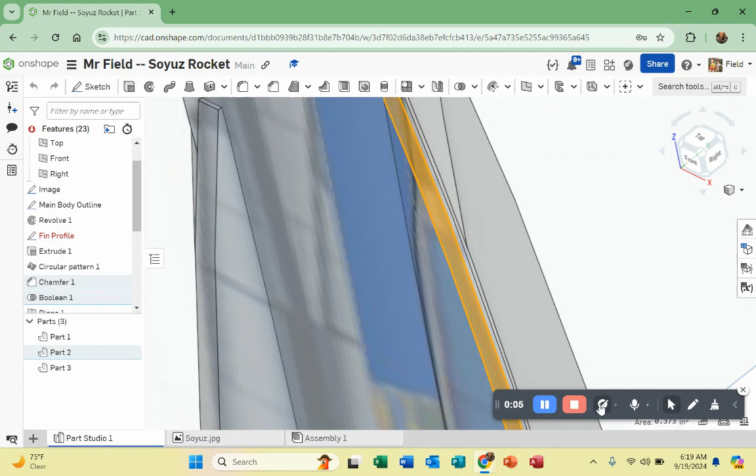Last video for the rocket. I'll finish all the little details that we really need to have to complete this.

One of the things I want to highlight here is that I put this chamfer in the top of my fin to make it more aerodynamic, a little better looking. I want to look at that a little closer.

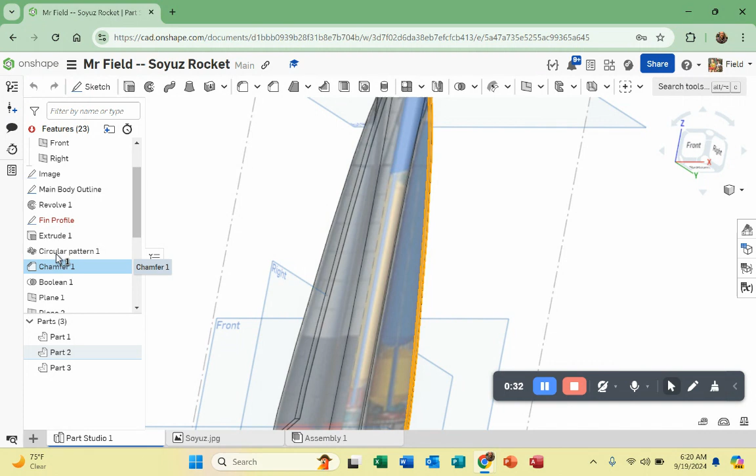Actually, I need to move this in the timeline. So I'll grab it here on the left, and I want to make the chamfer before I make the circular pattern. Let me repick it and show you the detail.

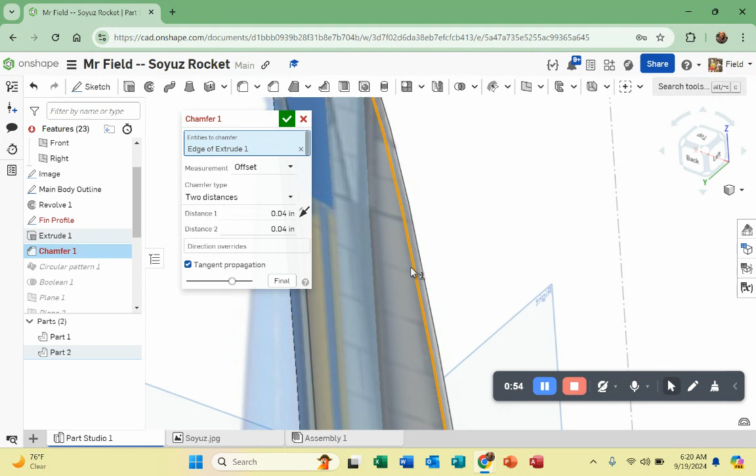So if I pick on an edge, you'll see it puts a chamfer. There are different types of chamfers - distance and angle, and two distances - and that's often the one I'm using more, because I'm picky and I like to have the look that I'm going for.

I want to show you that. In this case, I'm going to play with it and make distance number one a bit bigger, maybe 0.1. Let's see - okay, so that wasn't the one I was going for. I'm going to leave it at 0.04.

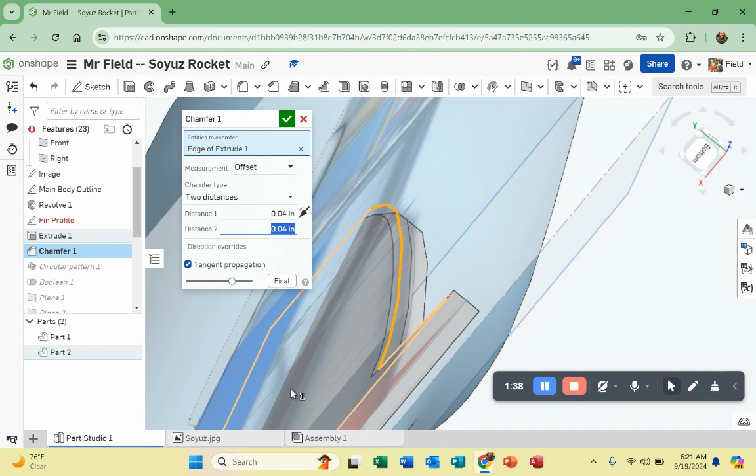And I'm going to adjust this leg to more like 0.2. You see that? That has got more of a leading back edge on it. And I'm going to duplicate that over here. Now we have a cool looking sharp fin.

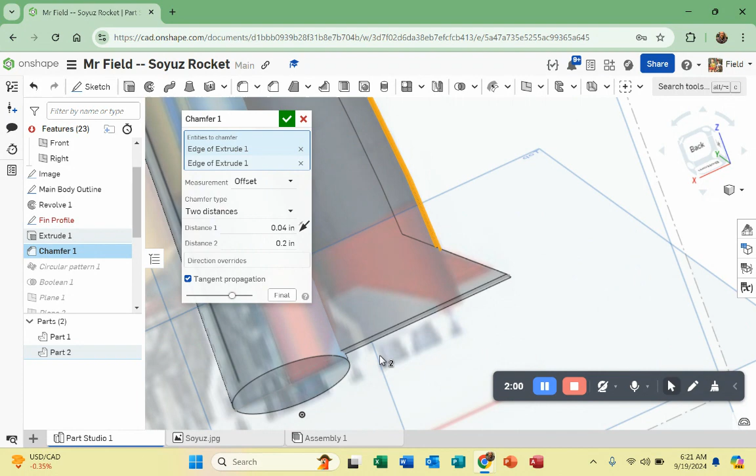I could dare to do some more sculpting down here, probably at this back edge as well. So I could get the chamfer out again and do a similar kind of cut back here at the bottom.

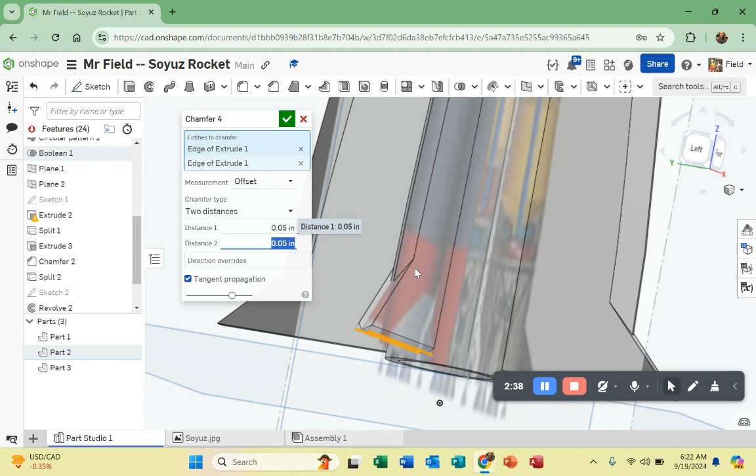Still too big, so let's try 0.05. I'm going to stop right there though, because it's easier to 3D print with flat surfaces at the bottom - we're going to have a lot more success. So maybe don't do that one so much.

So then you see it updated all my fins, because I moved it in the timeline to before the circular pattern.

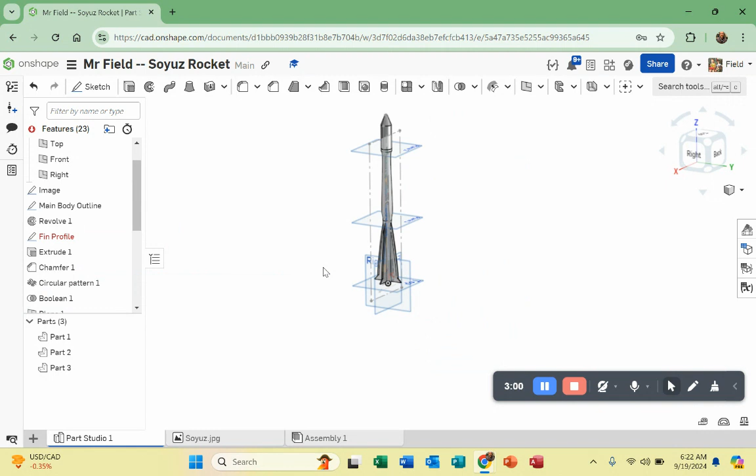What I'm going to do now is move on to an important element, which is a place to tie our shock cord to our nose cone.

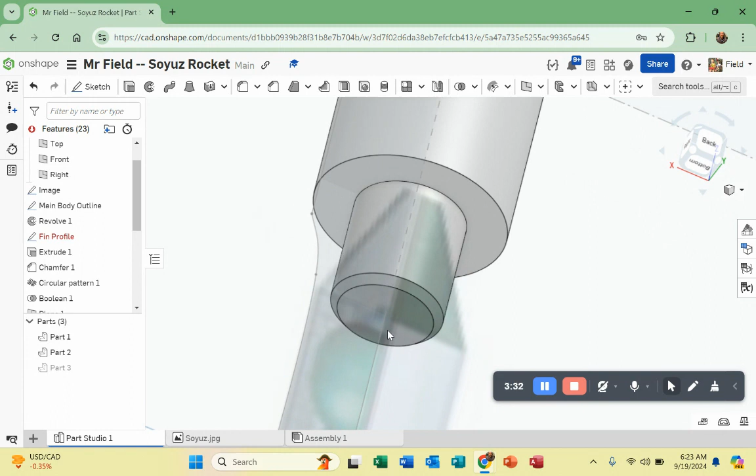You can use some license on this. I'll show you one possible way to do this. How about that? You need to create a loop of some type, or some way to tie off your cord to this cone, so that it all comes down together and you don't lose your cone.

What I'm thinking on this one - I'm kind of making this up as I go along, so just bear with me.

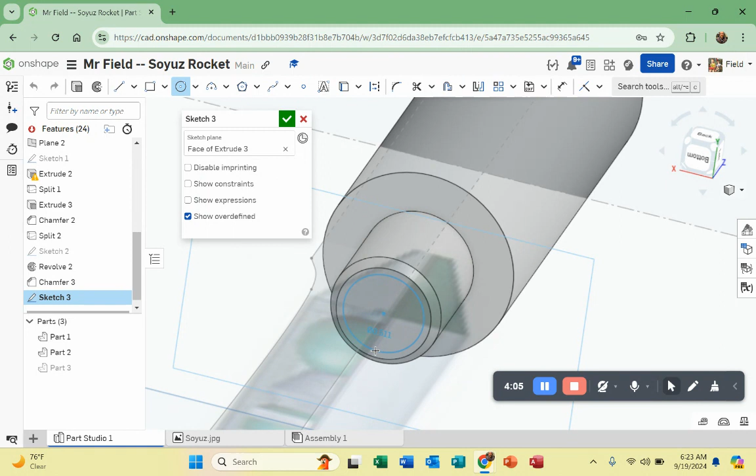I'm gonna click on this face, and I'll show you what I'm thinking. I'm putting a center point circle in here because what I really want to do is create a...

I'm going to go ahead and push this in, so remove. Something like that.

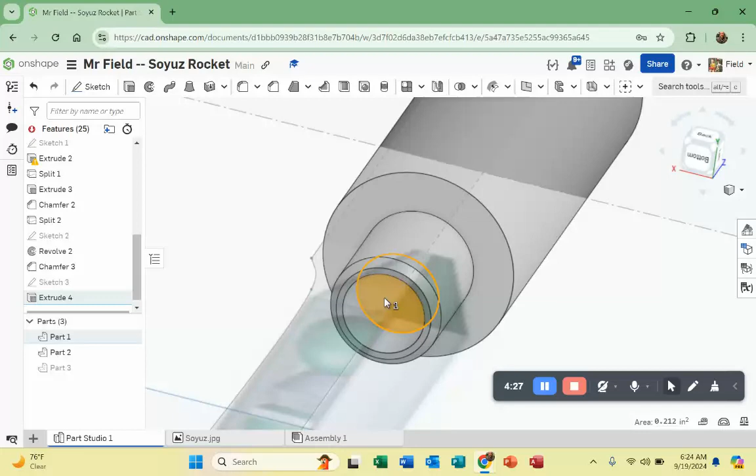Now I'm going to click on that face and sketch. This time, for the sketch, I'm going to use the center point rectangle, and put in probably something like that - you can see I'm really just eyeballing it here.

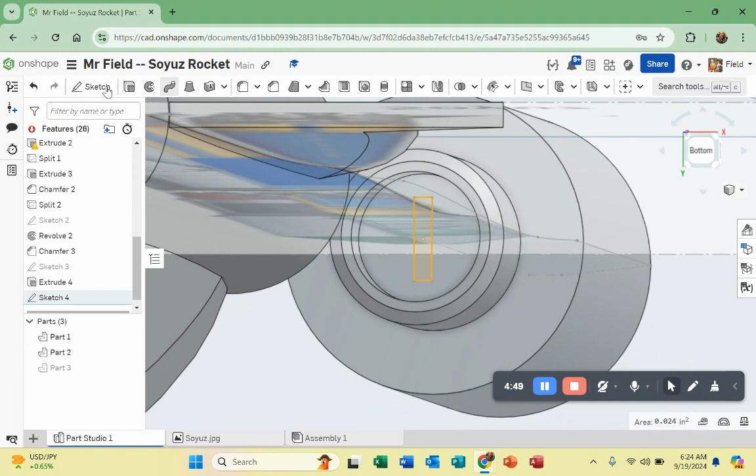And then I'm going to extrude that back up.

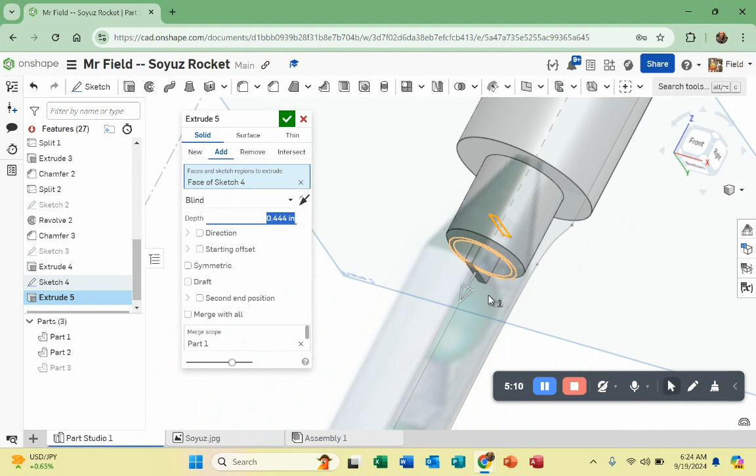Now this could be a challenge to 3D print if I'm asking it to print all this, and this would be the bottom face. But the Bambus print support material pretty good, and you usually can chip that stuff off, so I'm just going to go for it and hope for the best there.

If you can pull off a tie down feature in the way you design it that makes it easier to 3D print, then that is a good thing.

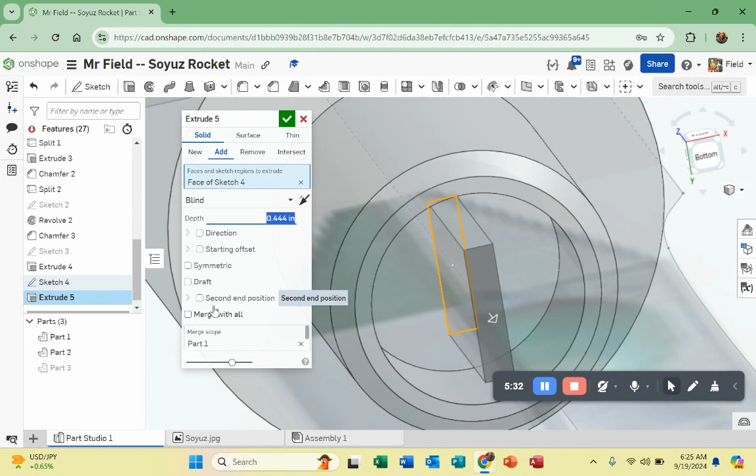For example, let me mention that if I draft this, you'll see you can draft extrudes, and that does make it easier for you to get in there and chip out any infill that might be taking place. If I make that little adjustment in the draft, you can increase or decrease that.

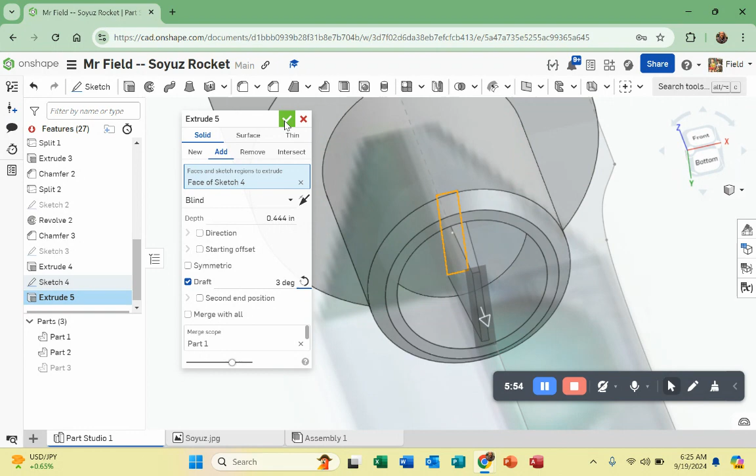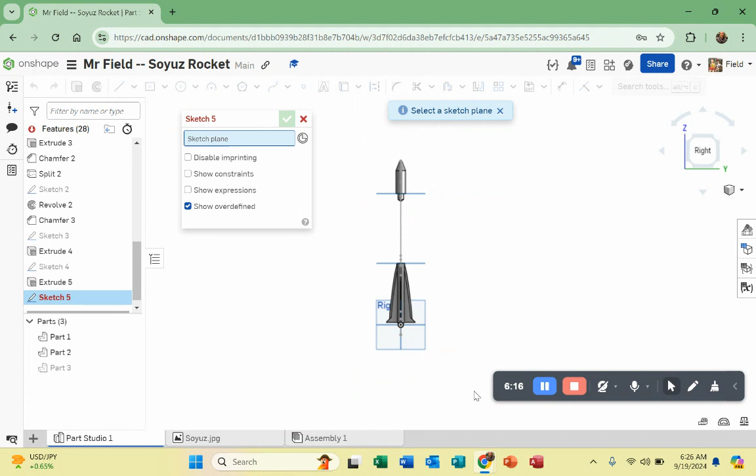And you can probably guess maybe the last thing I might add to this to get it finished would be a slot here or a hole. So one more sketch. I'll do this sketch, and I'm just going to pick this right plane and center point rectangle. Here we go. Probably like right there, yeah, just as long as I can get my shock cord through there.

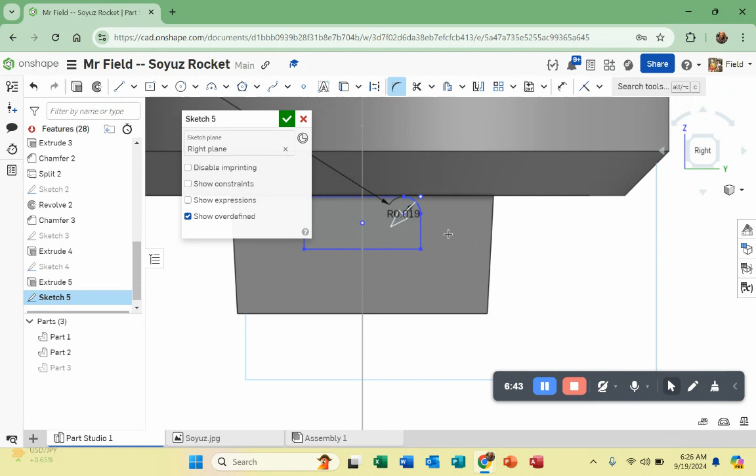I'll go in and put some fillets here, and then left click. That's called the sketch fillet. You click that leg that way, and then it puts it in, and you have to hit left click to accept it. And here it is.

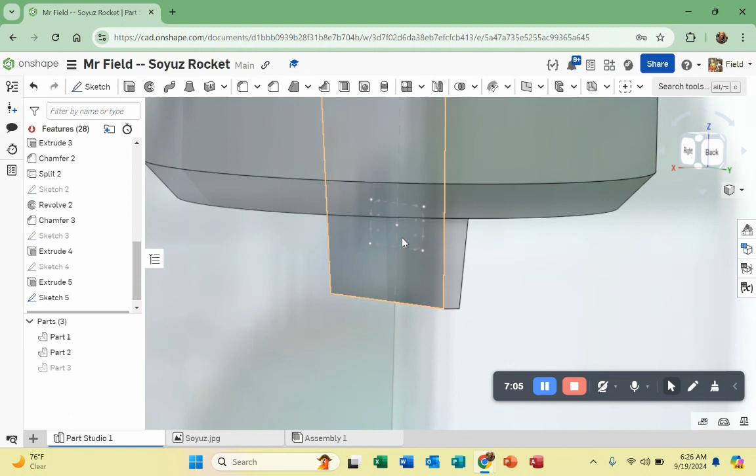Okay, and I can see I can't highlight it because the solid is in the way. It thinks I want to pick this face, and I really want to pick underneath it where the sketch is. If I hover over top of it, I can go to select other, and I should be able to get it from this list.

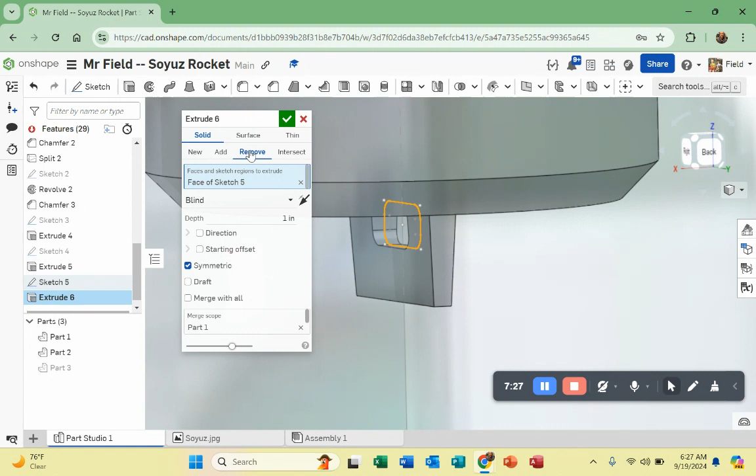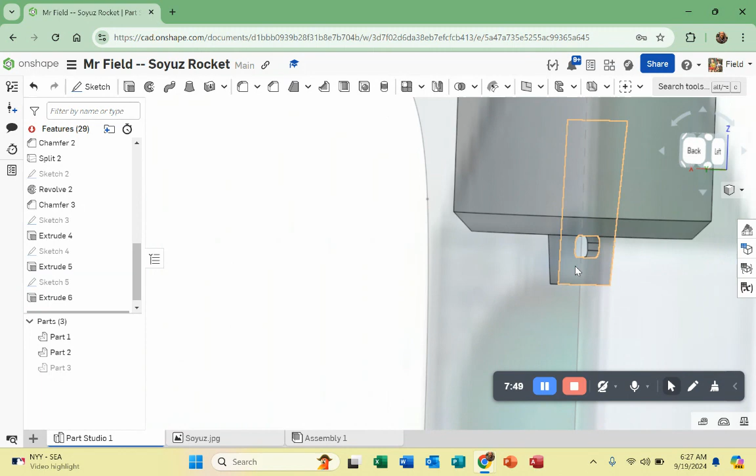There it is. In this case, you're going to extrude it, but a little trick is you're going to extrude it symmetrically and remove. I'm just going to be careful not to go too far. It says blind, and I just want to make sure I don't take anything more than I need there, accidentally off this lip maybe or something. There it is. Okay, that looks pretty good. And I can tie off to that when this all goes together.

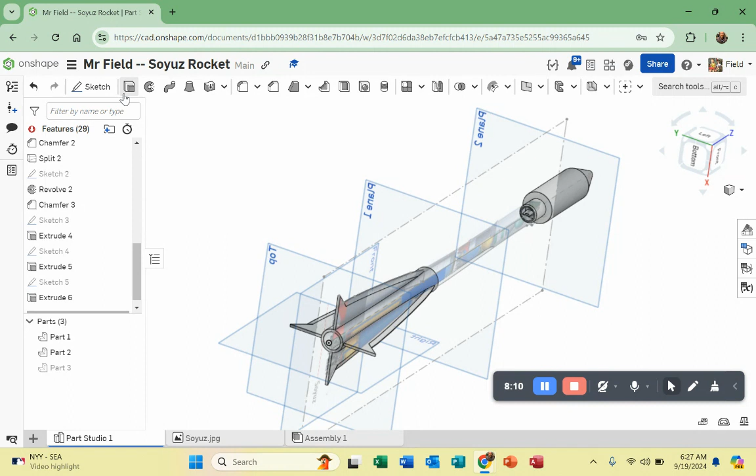Lastly, we're going to add a slot for the launching rod. So what I haven't even showed you is the assembly side yet. You'll see that your assembly side is going to be empty over here.

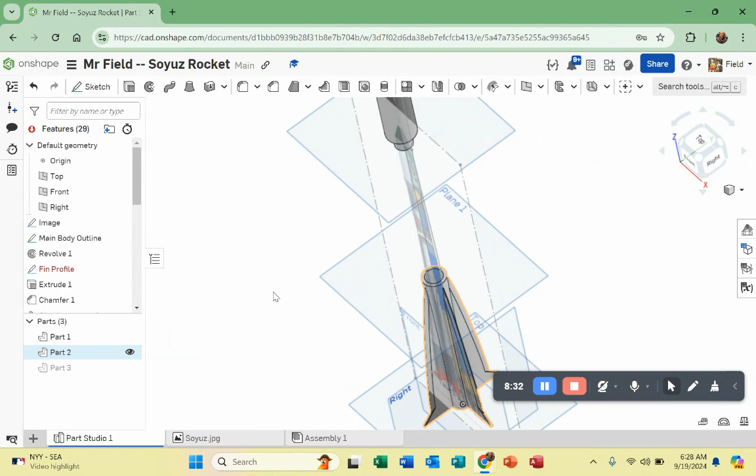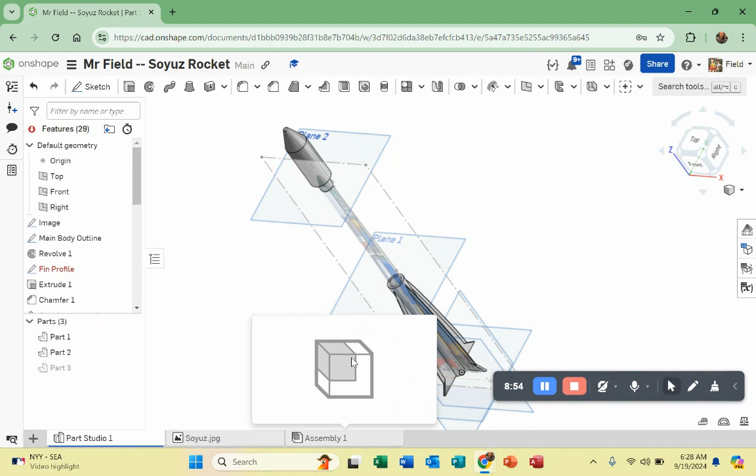I'm going to delete all that because I must have done something earlier. And I've pretty much got a version of the assembly right here, right? I've got all the components that I made. They're all down here, and they're all pre-assembled. So I don't have any need or desire to use the assembly tab on this project. I know some students are in the habit of doing that, maybe from the way they were taught. I kind of try and teach it a little different. I try and keep all my modeling parts in one part studio here.

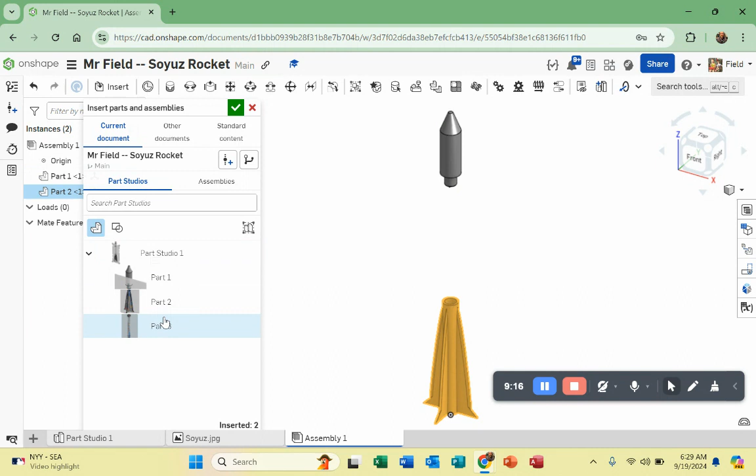So I'm really just using assembly when I need to get stuff to have a certain smart mate, or machine kinematic motion study, and different things. Sometimes it gets very complex. But why I'm going to mention this, I'll go ahead and click all these parts and just hit the green check mark. That way it'll put it at the origin.

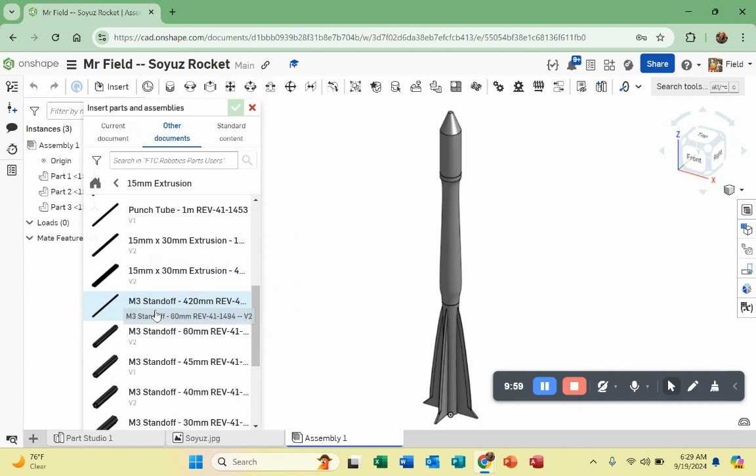One of the things I can get, and I'm trying to make sure I send this out so you all have it as well, is the FIRST Robotics library of parts. I'm going to go to Rev Robotics and pull in, we use FTC stuff, and there's this 15 millimeter extrusion. What I want is just one piece of this 15 millimeter extrusion. So I'm just going to go pick it from here, and then I'm going to place it in here, okay?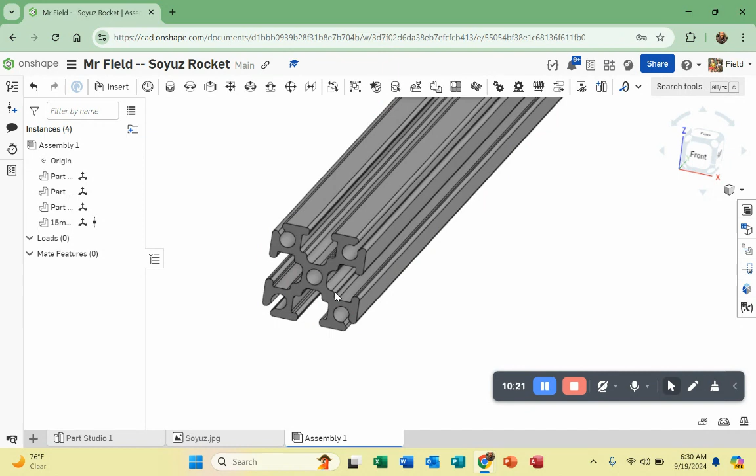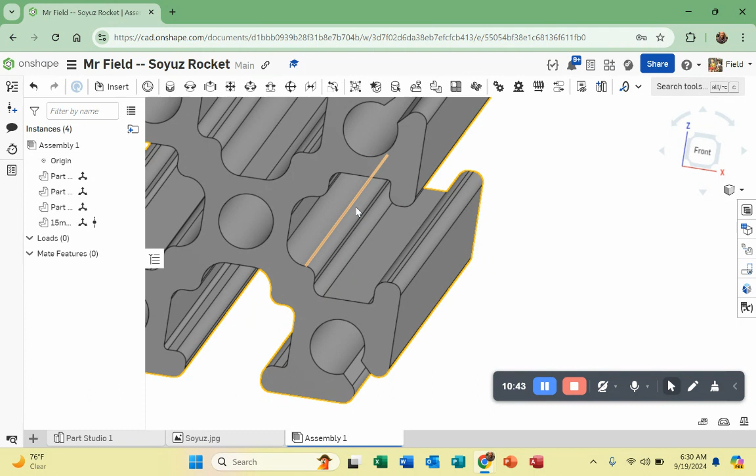And there's a reason, let me just mention it. So you'll see this is the rod. This is what I'm planning to use for the launch rod this year. And I have a nice long piece of it that we can mount on a stand. And they've got these slots down the rail, down each side of the rail. What I'm going to have you guys do is put in just a little slot on the side of the rocket that will allow us to launch this.

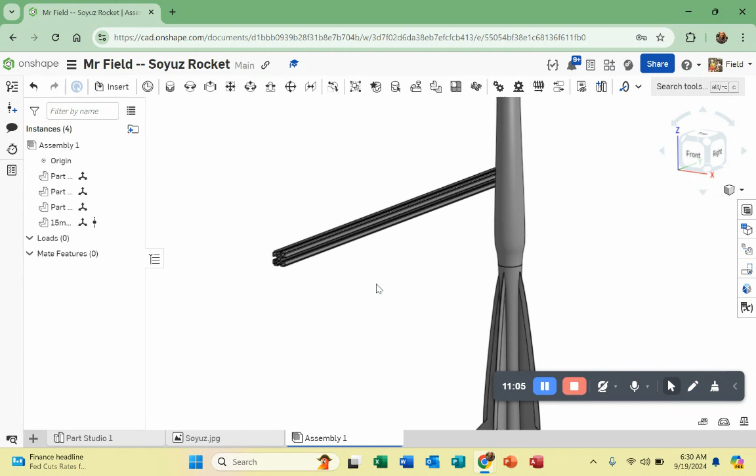So I'm just going to set this up for right now since this video is already at 11 minutes. I'll put one more video in to finish that slot once I prototype one and make sure it works. So I'm just going to hold off on that for right now and end the video right here. So there'll be 4 videos total for this rocket project. Okay.